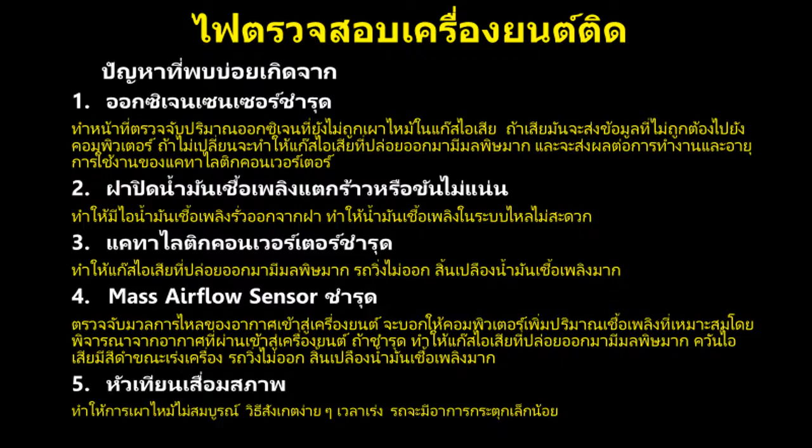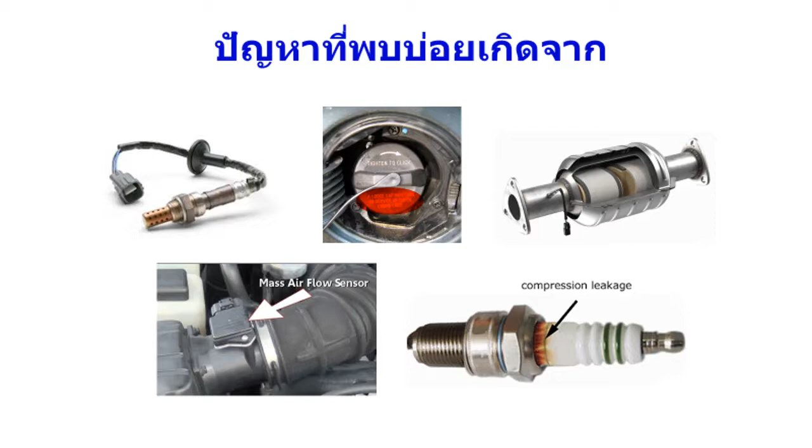The coolant temperature sensor is normally located at the top of the engine close to the thermostat, where engine coolant is generally at its hottest. The engine computer uses the output from this sensor to determine how much fuel to spray into the cylinders for the most efficient burn. Cold engines require more fuel in the fuel-air mixture, with the amount of required fuel decreasing as the engine reaches full operating temperature.

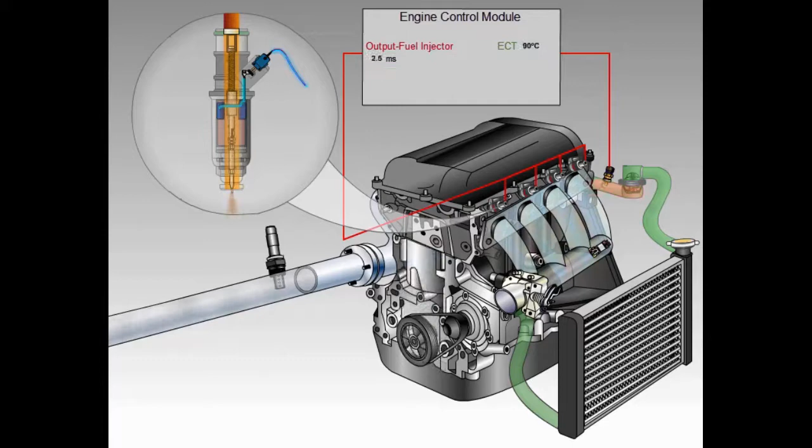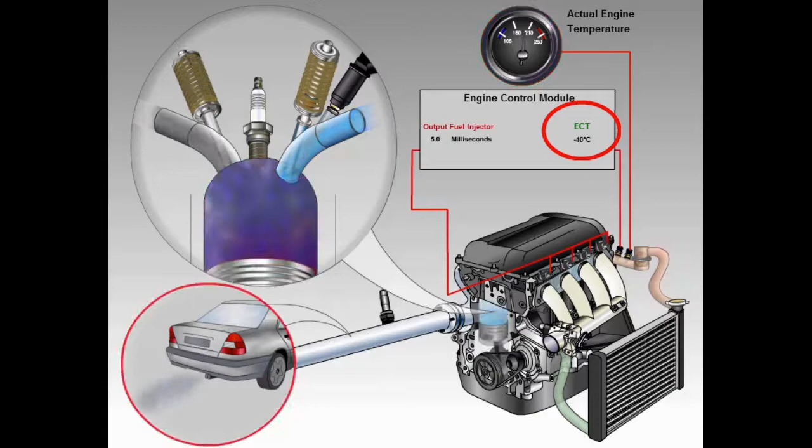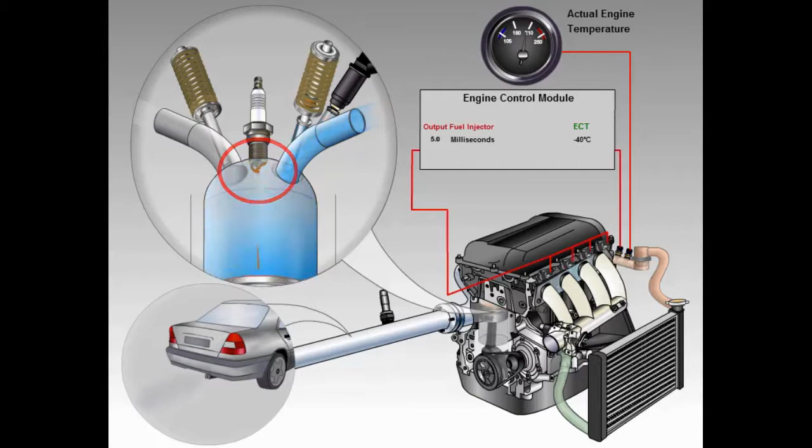When a coolant temperature sensor completely fails, the engine computer may receive a signal that the engine coolant is very cold, even if the engine coolant is actually hot. This results in a very rich fuel mixture, potentially adding so much fuel that the engine will not run. Defective temperature sensors will normally cause a diagnostic trouble code to set, turning on the check engine light.

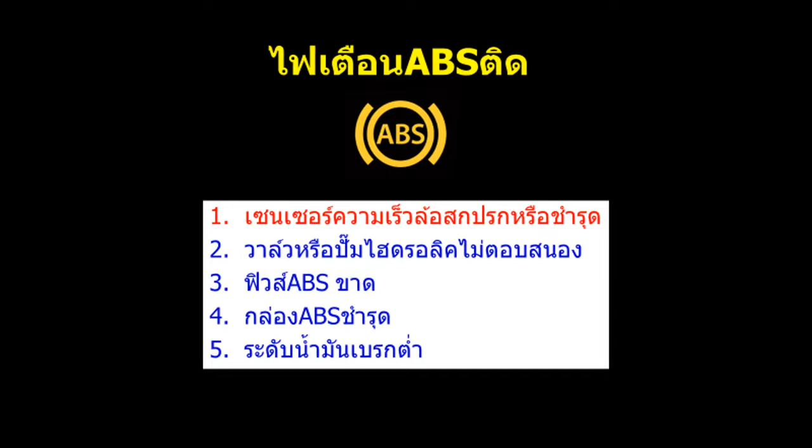It consists of a brake pedal, a master cylinder, wheel speed sensors, the electronic control unit or ECU, and the hydraulic control unit, also called a hydraulic modulator.

The wheel speed sensor consists of a notched or toothed rotor that rotates with each wheel and a pickup. As the wheel turns, a small voltage pulse is induced into the pickup and sent to the electronic control unit.

When the brakes are applied, the wheel's speed of rotation changes. This sends a new signal to the ECU. If the control unit detects that a wheel might lock, it sends a signal to the hydraulic control unit.

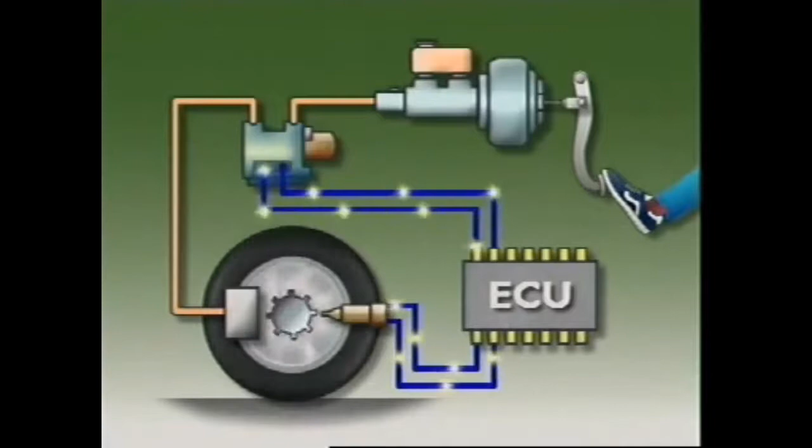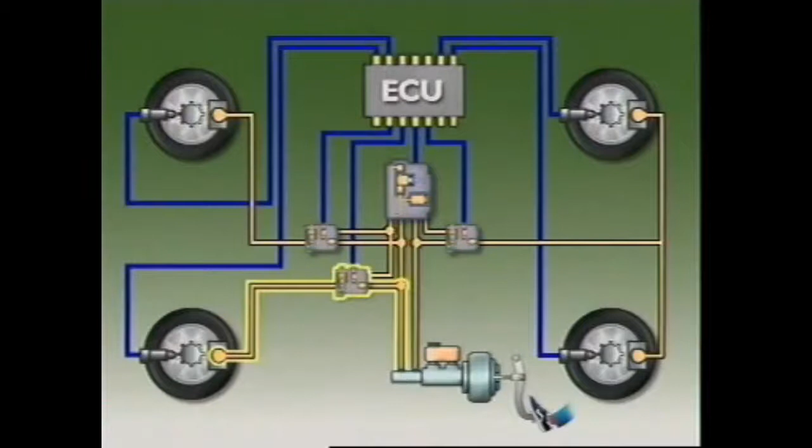In a 3-channel system, the hydraulic control unit uses 3 solenoid valves to control brake pressure and prevent them locking. The valves are in series with the brake master cylinder and the brake circuits. One operates for each of the front wheels and one controls both rear wheels.

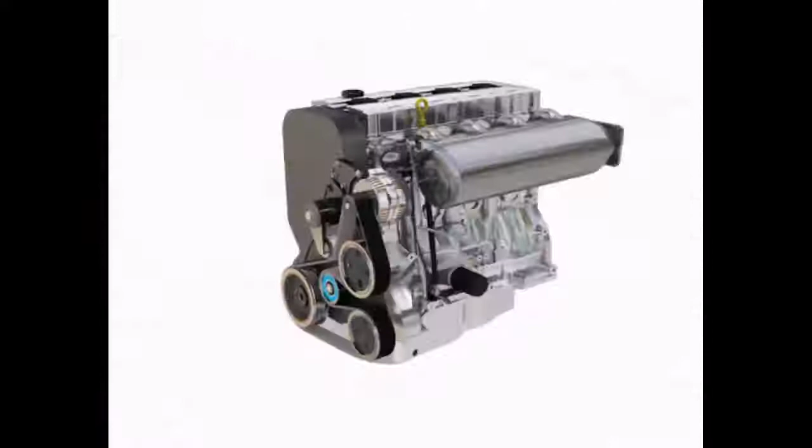The timing belt connects the crankshaft at the bottom of the engine with the camshafts at the top of the engine. The teeth on the belt and on the crankshaft and camshaft sprockets ensure that the valves open and close at exactly the right times.

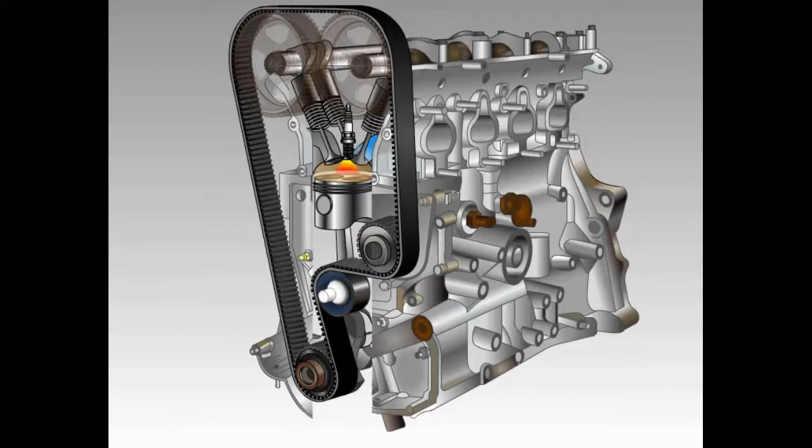The intake valve opens to allow fuel and air into the cylinder, then closes as the mixture is compressed, then ignited. Then the exhaust valve opens to allow the waste gases out. Timing belts are lighter, quieter, and more fuel efficient than metal timing chains, but require replacement at manufacturer-recommended intervals.

If the belt breaks when the engine is running, it is possible that valves can become stuck in the open position and bent by contact with the piston.

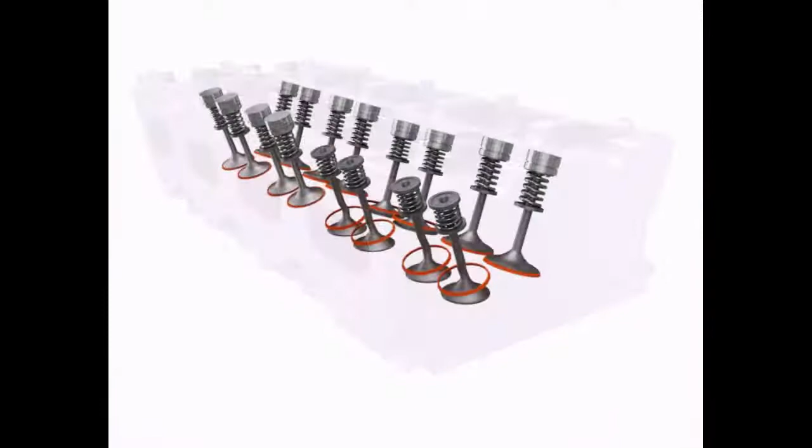During the timing belt replacement, the hydraulic tensioner that keeps the belt tight should also be replaced to prevent future failure as a result of reusing worn parts.

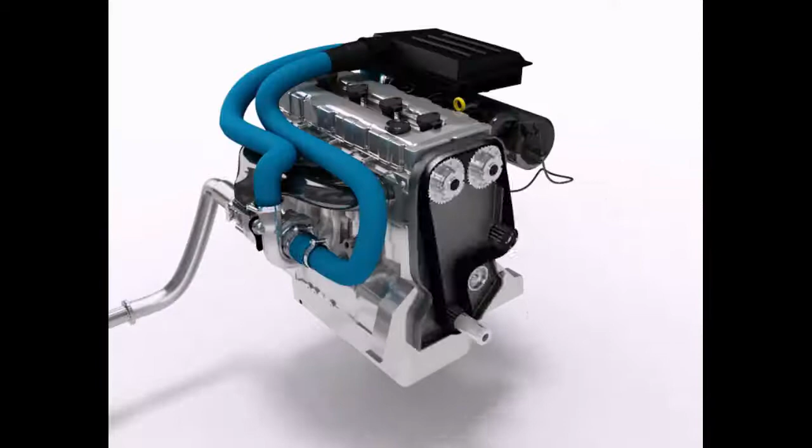On many vehicles, the pump that circulates coolant or antifreeze around the engine is also driven by the timing belt. Replacing this pump at the same time as the timing belt avoids the risk of the pump leaking or seizing as a result of worn bearings.